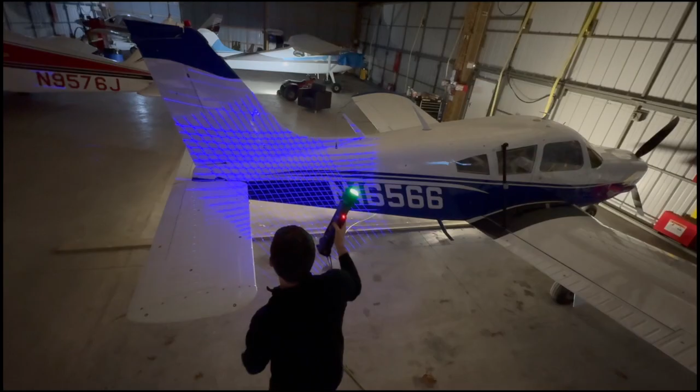Afternoon, everyone. My name is Cade Hill with Online Resources. And I'm Derek Miller with Connections XR. We provide scanning services using the Creaform technology, and today we're going to be unboxing the Creaform HandySCAN MAX Elite. So let's see what's in the box.

Okay, so in the case we have the scanning system. We have a USB drive with software, license files, and calibration files for the scanner. We have a power supply, 2 boxes of adhesive target dots, one 12 millimeter, one 6 millimeter. We have the cables which connect your scanner to your PC,

microfiber lens cleaning cloth, 4 magnetic clips for holding your calibration bars, 2 calibration bars, 1 small pack of clip cards for automatic clipping plane generation, and 2 unfoldable calibration plates for user calibration. Also in the top, we have the calibration certificate that comes standard with all Creaform scanning systems.

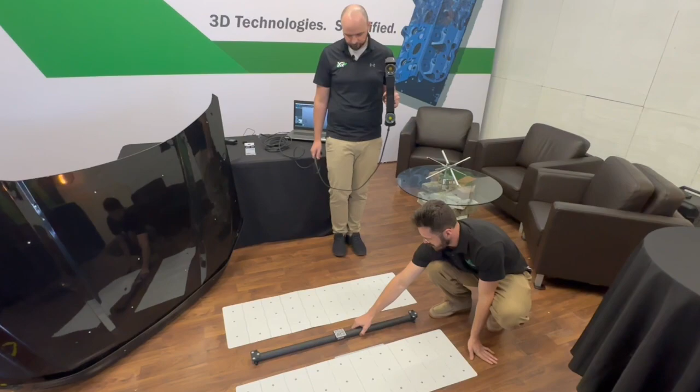Now this takes you through a user calibration similar to the other scanners, where it gives you an avatar on the screen that you have to follow around. I'm going to go ahead and begin the calibration by clicking the Calibrate HandySCAN button here.

It's being a little bit sluggish. There we go, so you can see the calibration setup image here, showing you how to set it up. I've set it have it up here, 2 plates in the calibration bar in the middle, just like how it's shown. That's correct, so go ahead and point the scanner at the calibration bar.

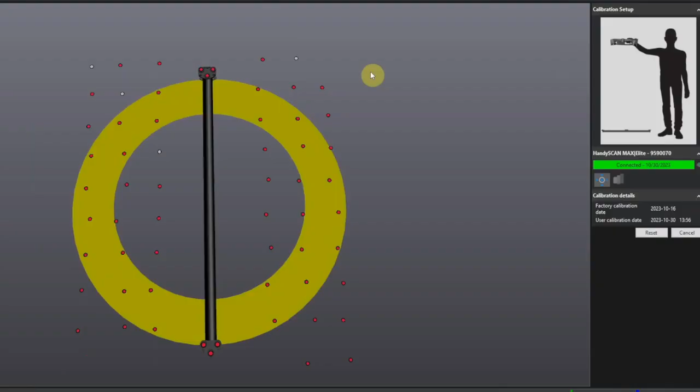Press the middle button on the back of the scanner, the center button right here, which is again standard and typical HandySCAN stuff. So I'm going to hit that button. Yep, and now you can see, wow, this is the distance.

This is the new distance meter, so as you get closer, that circle shrinks. You want to back the scanner away and get that circle inside the green circle. There you go, now get it closer. Okay, in the green, closer again.

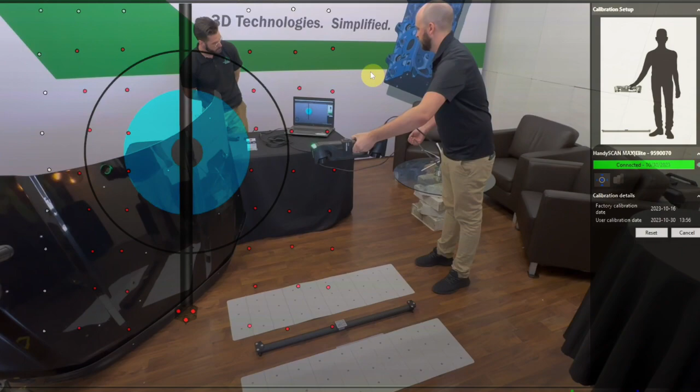Wow, this fall off is insane. Yeah, like this is crazy, how far I can be from my objects. Yes, and you'll notice during the scanning process how far you can be as well. I'll go over the different volumes a little bit later.

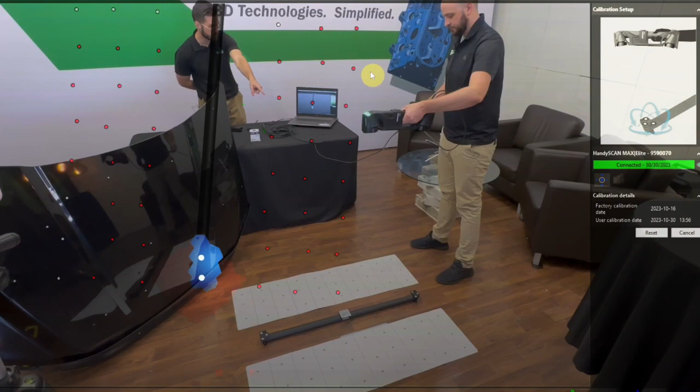So now it's asking you to go to this nearest end of the bar, and you can see there's this little spherical avatar, and the goal is to fill that up with blue color. So you're going to kind of swipe it around and see how it's filling as you're swiping it around.

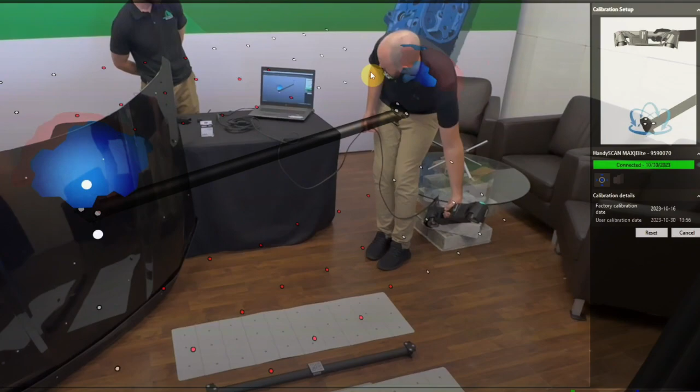So you got to get it at a little bit more of an extreme angle. There you go, and go all the way around. I don't think you need to be quite that low, but get onto the other side there and kind of fill those in. There you go, just like that. Perfect.

There you go, there you go. And then you're missing one other one kind of near your left foot down at the bottom too. There you go, there we go, filled it in. I'll do the same for the top. Correct.

And again, like most calibration stuff, once you do them a handful of times, it becomes really, really fast. This is literally my first time doing this, so you're doing a great job. Yeah, it is a little bit different than the other Creaform calibration processes.

Now, real quick, I see a little yellow something on the bottom. Yep, that's just the user interface kind of catching up with you. Once you finish filling those spheres in, it will go to the next stage of the calibration and finish.

Which is much faster than the MetroScan calibration, that's for sure. Yep, and this part is as well. Yeah, this isn't quite a MetroScan, but it's not a HandySCAN either, it's a nice sweet middle part. So it's almost like if you took the HandySCAN calibration and the MetroScan calibration process and kind of mushed them together into one. Yeah, okay.

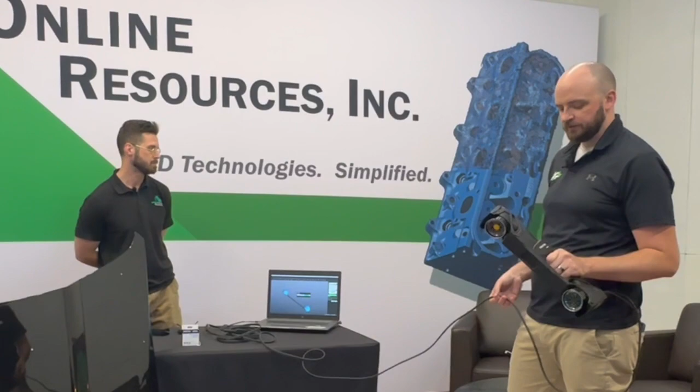Mm-hmm, all right, so while this is finishing, I'll go ahead and clean up our work area here.

So real quick here, Cade, we have a Ford F-150 hood that we're going to be scanning today. It's a pretty shiny black material and quite large, probably 6+ feet in length, maybe 4 or 5 feet in height, and this is a part we had lying around in our warehouse. It has severe hail damage all over it, so we thought it would be a great test subject to actually scan. We're going to go over some inspection videos later to figure out all the hail damage stuff.

Real quick here, Cade, now we have target dots on our part. Is there any particular method to the madness of target placement, what types of dots to use? Yeah, so the benefit of this scanner, it is a larger scale system.

Like I was mentioning before, it's intended to scan large parts, and it's kind of a sweet spot between the accuracy of the MetroScan and the ease of use of the HandySCAN. The registration is very similar to the HandySCAN in that you need positioning targets either on or around the part for the scanner to maintain its referencing. However, since you're able to stand so much further away from the part, and because the scanner's field of view is so much larger, you can use roughly 75% less dots than you would have with the HandySCAN.

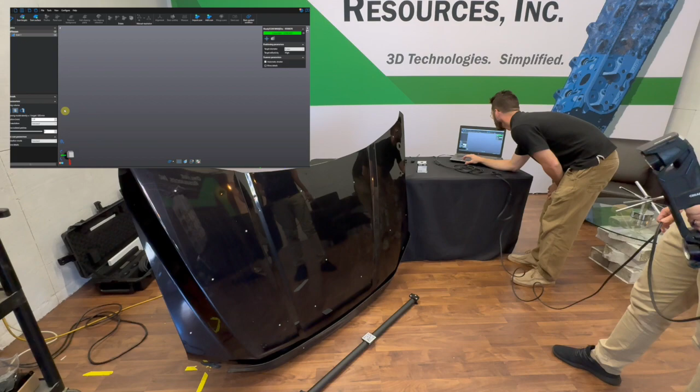All right, so switching to the mid volume now, we're going to use a modest resolution here. I'll set you at 2 millimeters. When you begin the scan, go ahead and press and hold the back button to start.

So the scanning process will begin here. Similar button flow as the other, but the only difference is they've separated this scanning process into a 2-stage process. When you press and hold the circle button, the center button on the back, it automatically kicks you into scanning targets only. When you press and hold to process, you get to review the targets you've collected, making sure all of them are collected correctly. Then you press and hold again to enter the actual scan surface.

So right now we are in targets only mode. Press and hold the circle button - this will enable me to start scanning. Now you're in targets mode, so go ahead and tap it once. And there you go.

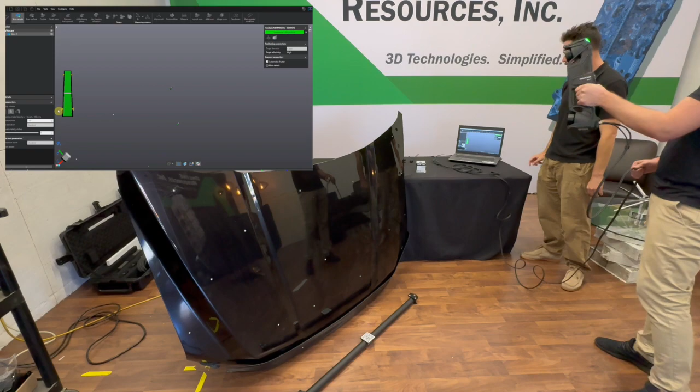So now you can see you're collecting targets. See where your distance meter is - you're in the middle of the far volume, in the mid volumes. You can even take a step back if you like. This distance meter is kind of a throwback to the Go Scan 50 and 20s, that kind of user interface. Now make sure you're getting your bar - see how your bar has appeared?

You're going to want to cover your bar enough times for this indicator across the bar to turn green. When we say cover, we mean shooting from different angles. Shoot it from there - see, it's gone green now. And it's best to even err on the side of a little bit too far than a little bit too close. See, now you're pretty far, so just kind of err on that side.

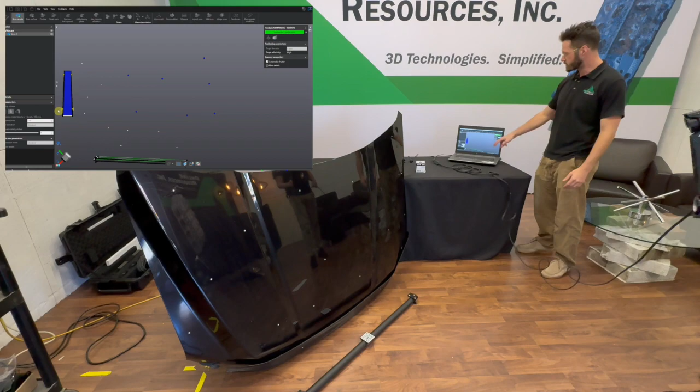Because remember, we want to use as few target dots as we can, and you're going to be seeing more target dots with a wider field of view. To get a wider field of view, you need to step further back.

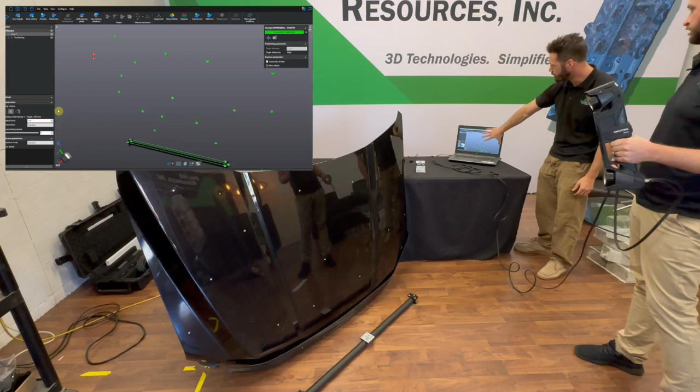So there you go - you've collected your targets and your bar. Go ahead and press and hold the center button. And there you go, now we're in a stage where we can review our target dots. You see there's a couple here on the left that are red - that's okay, but most of what we're seeing here is green. It's indicating we've collected these well, and the scanner understands the pattern of dots, so it will be able to register correctly.

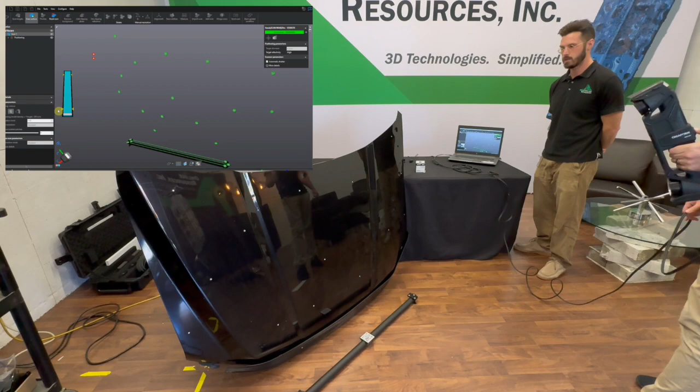So now if you press and hold the button again, it will send you into scan surface. Now tap it once, and you'll be scanning. Wow, so we're scanning right now. It's insane how far I am from the part - this is wild.

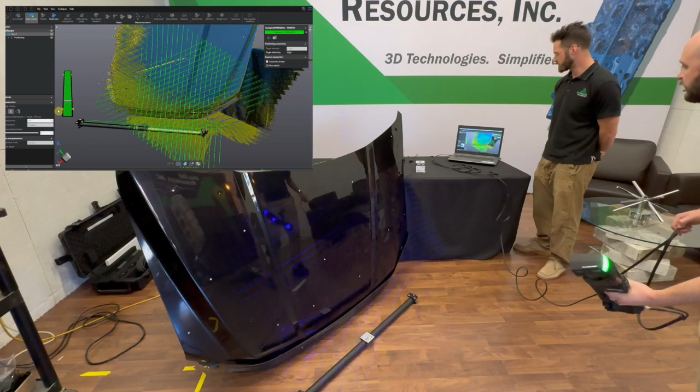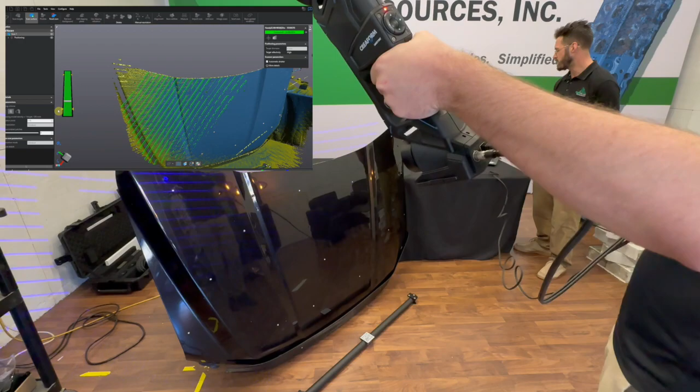So keep in mind, I'm at a 2 millimeter resolution here. Obviously, the same rules apply. You'll be able to scan faster at lower resolutions. Sure. Need to move a little bit slower at high resolutions. Right. You'll notice there's the same sort of user feedback from the scanning system in terms of, yellow has not been collected well enough. It eventually turns blue and you get full saturation as you go over things more and more.

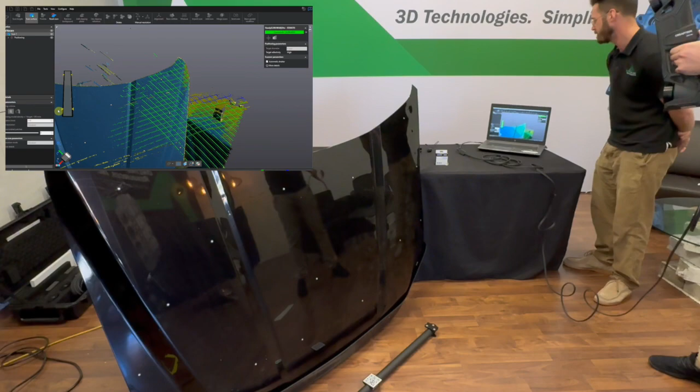And this has the standard kind of smart resolution feature that previous scanners have. Correct. Right now we are at 2 millimeters with smart resolution active. Okay. Which means that in all of the high curvature areas, it will be using a resolution of 1 millimeter. The software will notify you if you're using a resolution that's incompatible with smart resolution for limitation issues.

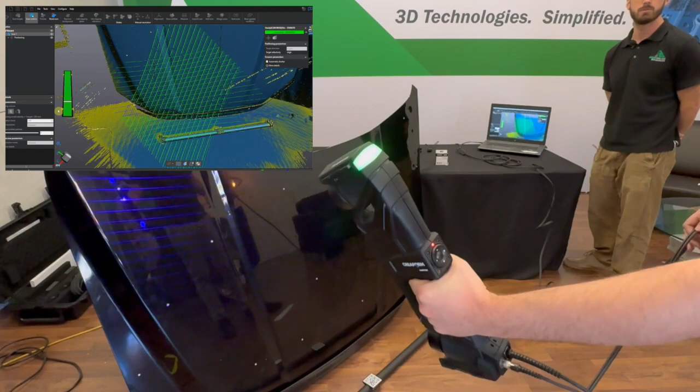Things like that. Gotcha. So we're pretty much done scanning this whole part. That was fast. Yes, correct. Wow. Okay. So go ahead and press and hold the button. And there you go. So notice, we've scanned this entire part, but we still have the floor, right?

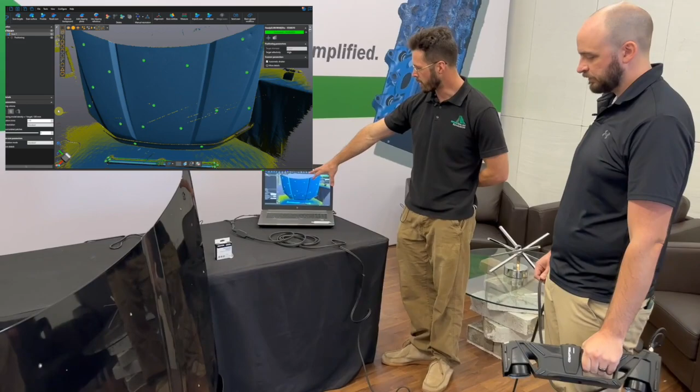Yep. Another development that Creaform has come up with for this particular scanner is what are called clipping cards. So these clipping cards, like I showed you in the unboxing video, are here. They come in a little envelope. They look very similar to the coded targets you would see with a MaxSHOT system. Yeah. The way these work is we set them on the ground, around the part, just like this. You need at least 4 to create a box.

Now, obviously when we come over here, we're not going to be seeing very many targets. Yeah. But let's pretend for a second that we wanted to scan something different, right? Let's say we wanted to scan maybe this guy here, or let's scan this MetraSCAN case. We can still use the targets behind this as registration, so that's fine. So I'll set these here like this. Like so.

So what this does is during your target collection phase, the scanner will collect these clipping cards on the ground. Okay. And these clipping cards will automatically create a clipping plane across them and a bounding box around them. Okay. Everything outside of that will be clipped away, and the floor will be clipped away as well. So we're doing a 2D plane plus another. Basically, think of a rectangular prism being projected up from these, and everything outside of that is going to be automatically removed from your scan.

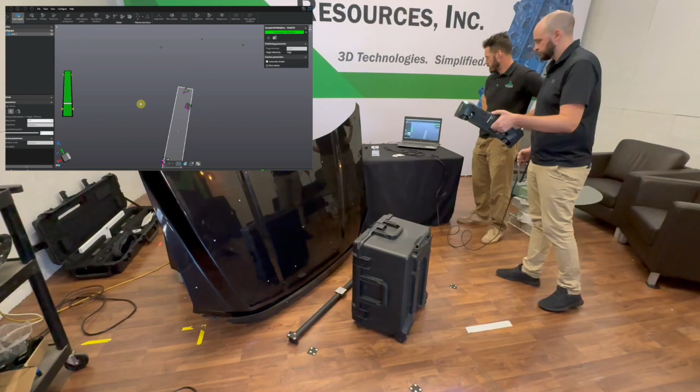Got your clipping cards. Oh, it's like drawing. So there you go. So there's your box. Yeah. Okay. And same rules. So I'm catching the calibration bar here. Same rules apply. I want to get that green. Right. So hit it from multiple angles. There we go. We just got it. Yep. Okay. So now go ahead and press and hold.

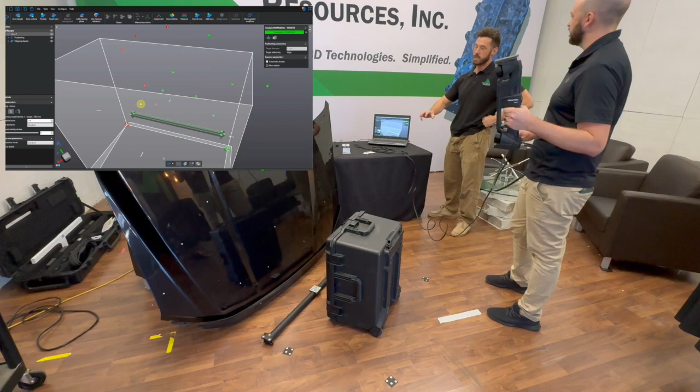So anything outside of this volume will be clipped and no longer scanned. So now you won't even be collecting the hood. You're just collecting just the case, right. Yes, that's okay. So go ahead and press and hold again and begin scanning your surface. And away you go. Wow. So those are the clipping cards. Yeah, this is really slick.

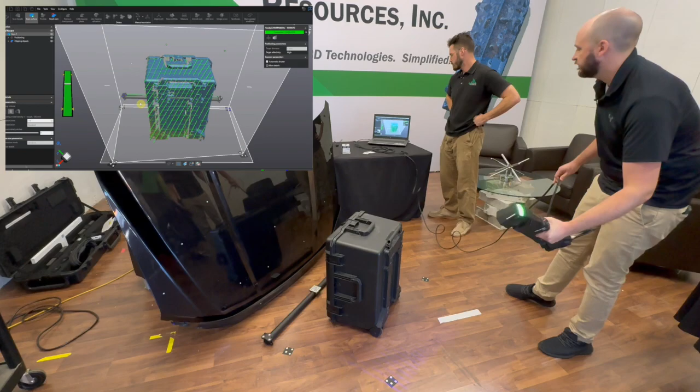So you can imagine you're in a museum or something, scanning an artifact on the ground. Yeah, or just a big car, vehicle, parts, whatever. Yep, exactly, just to kind of clip out the shop floor and all that. So you see the setup's not great because you're not seeing any of the dots back there, but you get the idea. Yeah.

So just for testing's sake, if I spray over here a little bit, I'm not getting any of this hood whatsoever. Right. It's clipping all that out, and that's fantastic. Yep. I love the auto shutter. That's a really cool feature. So do something slick for me, Derek. Press that button on the right.

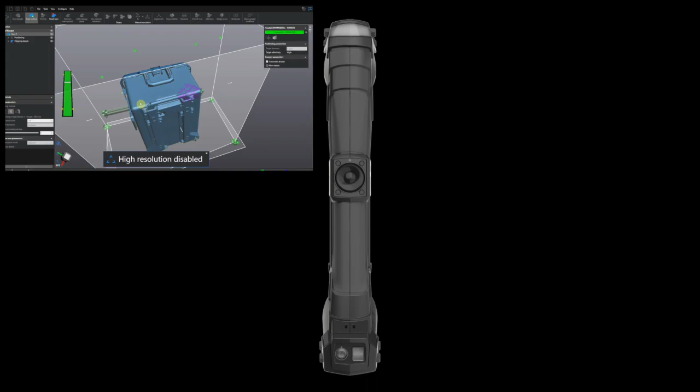This scanner is outfitted with a high resolution mode similar to the HandySCAN. So the way it works is you press the right button on the scanner. Up and down is zooming just like normal. The left button brings up your menu, and you can scroll through your menu and do whatever you need to do. So you can exit that. But the right button goes in and out of what's called high resolution mode.

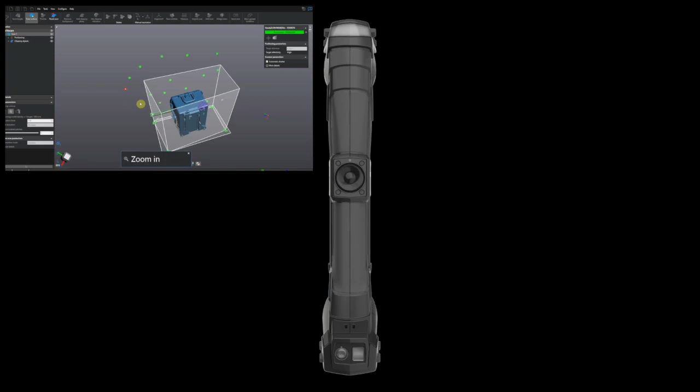What high resolution mode does is it kicks you into the nearer volume to the volume you're currently in. So if you're in the far volume, pressing high resolution mode gets you into the mid volume, and you have to physically get closer to the part. But the high resolution mode does a 4x on your resolution. So since the near volume is capable of a higher resolution than the mid volume, it has to kick you into the near volume in order to capture at the resolution that's only capable in the near volume.

So a perfect case in point, let's say we're scanning this actual big truck. We have the big body panels, we can get away with a lower resolution. And then we get to a part that's more intricate, like the grill, where there's more fine ribbing. We would want to use high resolution mode, get closer to our part, and knock those out.

Now the kicker is whatever you want to get in high resolution mode, you need to cluster your dots closer together, because it still needs those dots for registration. So when you bring the scanner in here, obviously it's not seeing any dots in this area. So if we wanted to do high res on just this area, maybe I can take a few more dots and we can move this MetraSCAN case. Yeah, to kind of plan out your scan. So it takes a little bit of pre-planning to figure out what you want to do exactly.

But let's say we had a feature here that we wanted to find at a high resolution. We'll just do this. Put some dots over here, maybe. Yeah, and this is something that we see a lot of. If we use a MetraSCAN and we're scanning body panels, we would save those out as separate scenes, and then do a separate scan of more high res stuff. So that's really slick how it combines those together.

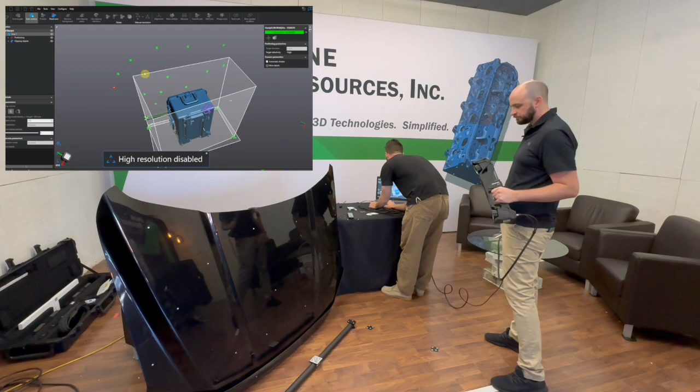Right. You can still do the same thing in here too, if you want to do different scans, high res scans in some and low res scans in others. We'll just take this remote. So we got this remote that needs a higher resolution, right? So go ahead and set that there. I'll reset your scan again. Okay. So go ahead and begin your scan, collecting everything as you did before.

And do we need to remove this clipping volume? Yes, we do. Is there any particular order? You just kind of throw them down, there's not an order like 1, 2, 3, 4? No, they're all identical, so it doesn't matter. The clipping card, you mean? Yep, they're all identical. Cool.

So let me remove it because there's a clipping card here. These clipping cards are coded, which means it won't just see these as regular target dots. It knows this is a clipping card. So it's important to get those out of your scanning scene if you don't want a clipping volume in your scanning scene. Gotcha. So go ahead and press the middle button, begin your scan again.

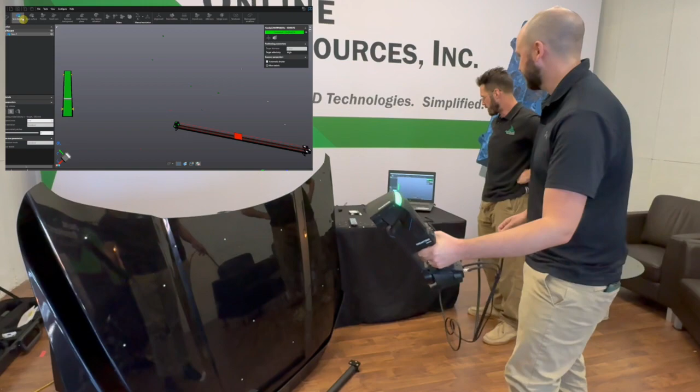Collect your dots, and again, you want to step a little bit away. Yeah, that's going to be a little bit weird to get used to. It's tough to get used to, definitely, to stand this far back from a part. Yep, there you go. It's really got the bar, so go ahead and saturate your bar a little more. Make sure that's all squared away. There you go. Got it.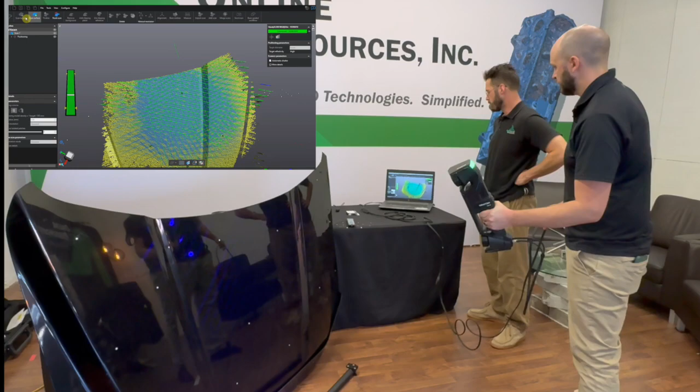Now come over here and get these dots. There you go. Good. Well done. All right, so press and hold the button. Now away you go. So start scanning the hood. You're in the mid volume now, so keep in mind that you'll want to step back just a little bit. Yep. I'm gonna just scan the hood first, right? Correct. And then move over and get that remote. And then once you're ready to scan the remote, you'll tap the right button, go into high resolution mode, and you'll get up close on the remote and scan the remote.

Wow, this is so fast. Mm-hmm. And this is a challenging part as well, the dark, shiny part. Yeah. It has very similar data capture capabilities as the other scanners in the Black series.

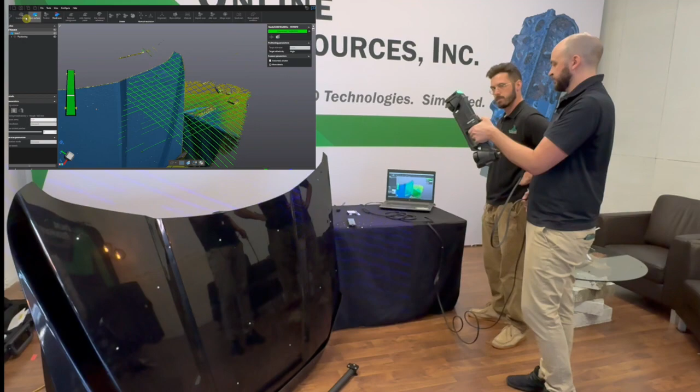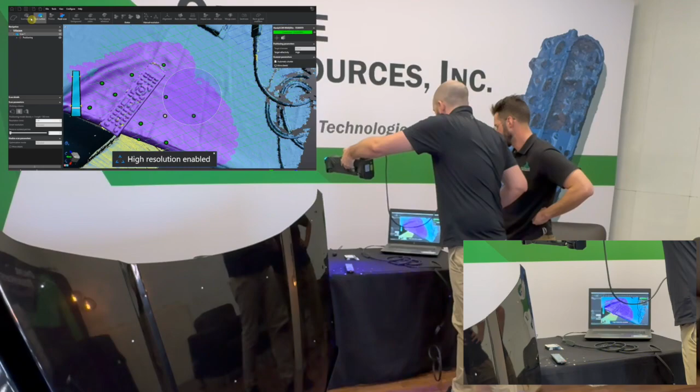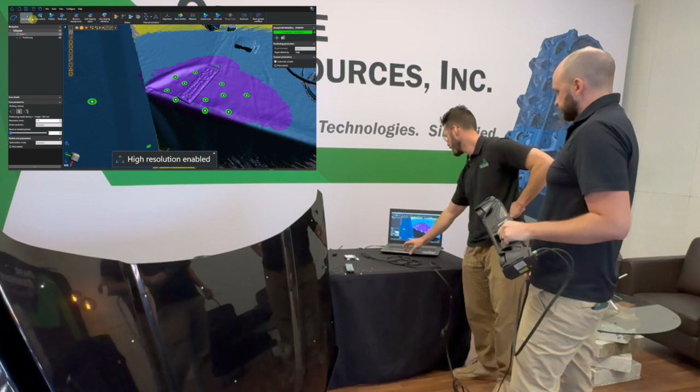Okay, so I'm ready to go to high resolution mode. Press the right button. So tap the right one once. And notice now you're way too far away. So yeah, get closer. I gotta get really close. Okay. Way close. Yep, there you go. Now you're getting high res on the remote. And you see how it's saturating purple. Yeah, okay. Okay, and then when we process this, go ahead and press and hold. I'll go ahead and finalize the data, and we'll take a look and see what high res did. So I'll go ahead and click the finalize button.

Yeah, I just can't get over how light this is. Like for being such a big scanner, you'd think it'd be really heavy, but basically I've been holding it the entire time and I just didn't even notice it, so that's really cool.

Now, for the near volume and the mid-range volume, it needs 6 millimeter high reflective targets. Okay. For the far volume, it requires 12 millimeter high reflective targets, similar to the MetraScan. It comes with a box of those. You can see them sitting in the box over there. You cannot mix the 6 millimeter and the 12 millimeter targets in a single scan. It will only reference off of one or the other. Okay.

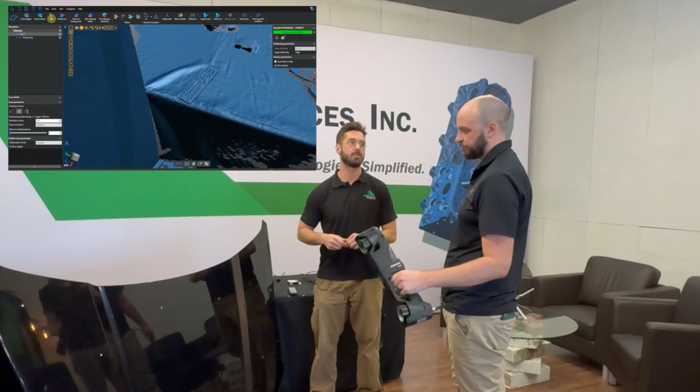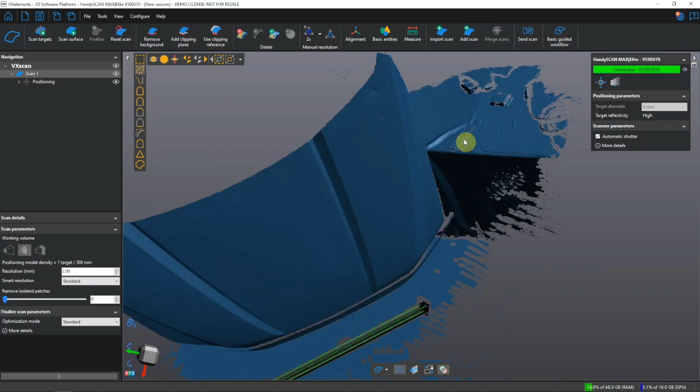Okay, so there you go. So now it's done. So see, now you've got your lower resolution hood here. And then zooming in on this remote, we've got a nice crispy high resolution remote. That's slick. That's really slick. Cool. Well done. So this is the HandySCAN MAX Elite. Awesome, Kate. Thank you so much for showing me this. You're welcome. Literally, this is my first time, guys, doing all this. First time user. So very easy to use, very easy to set up, very user friendly.

Thanks, guys. So I think we can all agree that the new HandySCAN MAX series is an exciting product. It's also adding capabilities for those large parts where the HandySCAN and the MetraScan have really left off. I'm also excited about what other objects we can scan. You've seen a little sneak peek here of the plane that we're going to be scanning, as well as a boat and 2 Indy cars. So keep an eye out for those videos coming up.

Derek also mentioned an inspection video. We're going to be taking the hood here with all the hail damage and throwing that into Creaform's VX Integrity dent analysis software. And we're going to be giving you a unique opportunity to download some of this data and take a look at it for yourselves.